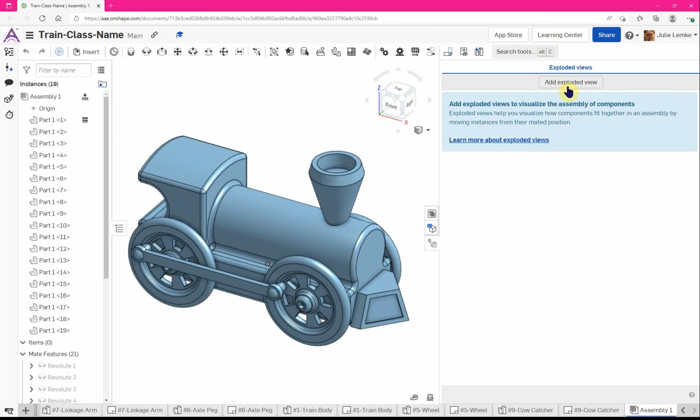You can find that in this little box right here. If you hover over it, you can see it says exploded view, so you click on it, then click add exploded view. Sometimes it takes a little while for that to show up. It did the first time I did it, I'm not sure why, but after that it'll show up pretty consistently.

Alright, so I'm going to zoom out. What you do to make an exploded view is basically pull all the pieces of your train off so you can see everything individually.

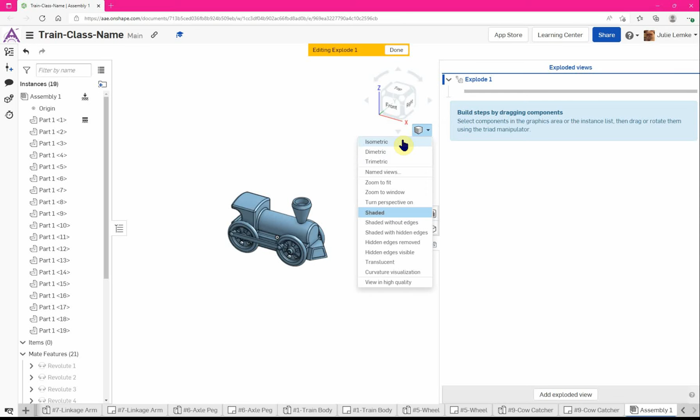One thing you want to make sure is that you get this view set to isometric. The reason is because when you do your work drawing later, isometric is how it's going to be placed in. Trimetric is the default for this program, but with work drawings, isometric is what you want.

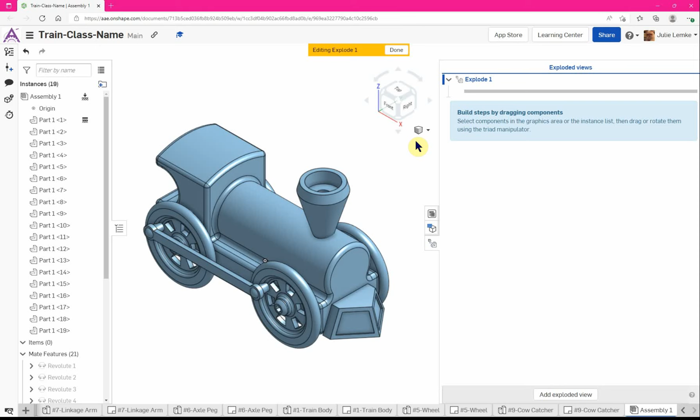There's ever so slightly a tiny little change, but when you're pulling things apart and want to make sure nothing's overlapping, that tiny change will go from everything looks fine to things are overlapping. So what we can do here is start by clicking on a piece.

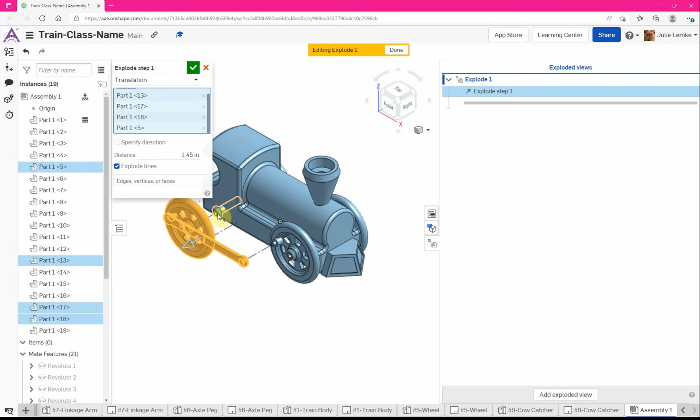I'm going to show you that you can actually move more than one piece at a time. I'm just going to pull these pieces - you can see how I moved the axle peg and the linkage arm all at once. Then I can grab a few more, and if I forget something, I can grab it all at once like that. I'm just going to scoot these out a little bit.

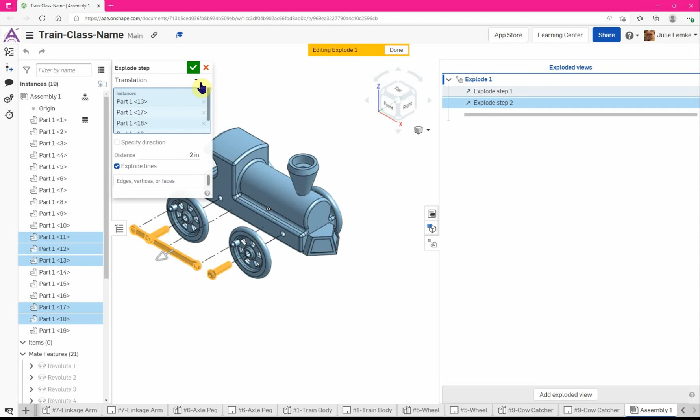Now I don't want the wheel, but I still want to pull some pieces out. Now I don't want these two pieces, and now I want to get rid of that one and just move those. Hopefully you guys are better at zooming than me. Alright, so that is everything we want for that one side.

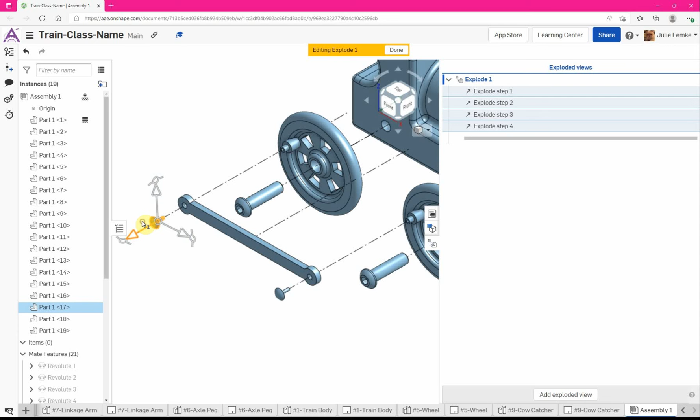Alright, the next one I'm going to do - you're wondering how I can move this. I'm using a desktop, so I have a mouse, so if you click on your scroll wheel, you can move this around. It's called pan, and it's quite helpful for when you're moving things around in a view like this.

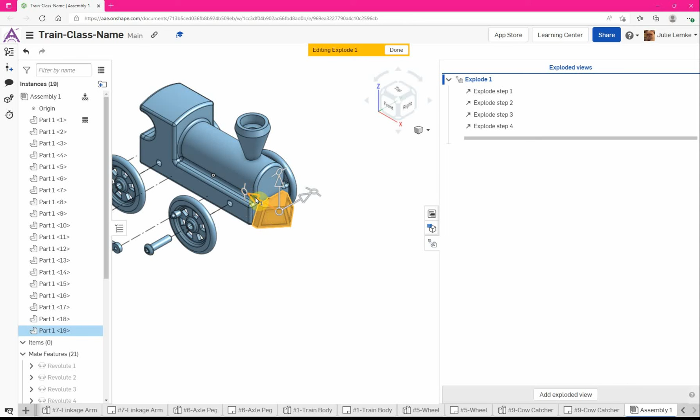So we click on our arrow and just drag. That's all we need to do for that piece. Alright, and then on this back side, I'm going to do the same thing that I did with the front, where I have a whole bunch of things selected all at once. Hopefully you have better luck clicking than I am. There we go.

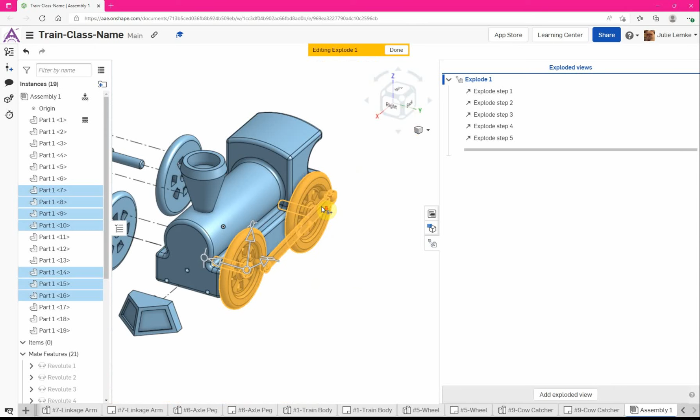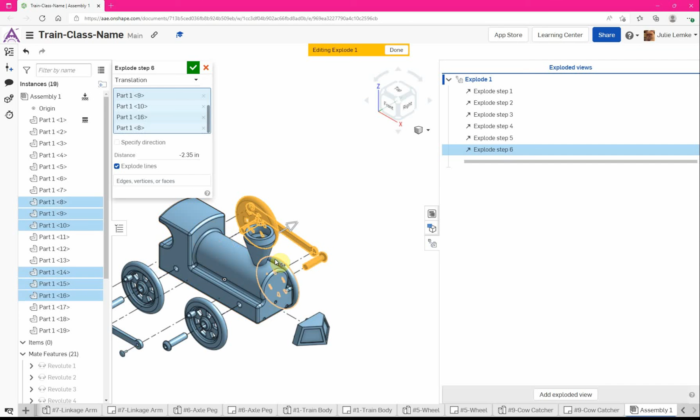Alright, again we want it isometric, so we're going to scoot this over. I know it looks like some things are overlapping, but this piece is going to be moving in a second. Alright, so I'm going to deselect the wheels. Oop, I forgot to click OK first. There we go.

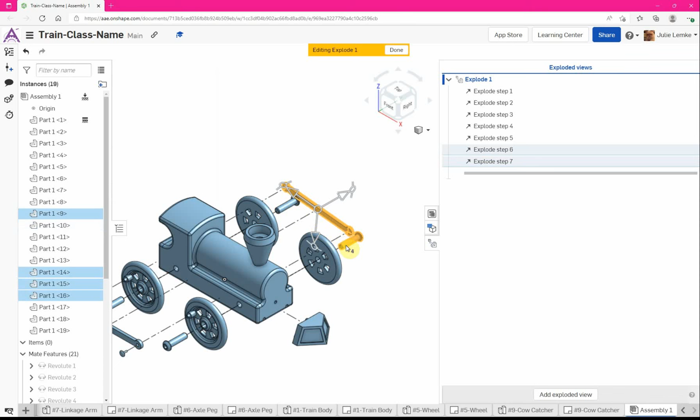Alright, now I want to deselect the wheels, click OK, deselect our axle pegs, scoot it a little more, accept. Unselect our linkage peg, or not - oh my goodness, linkage arm, and then we're going to move our linkage pegs. Alright, so that is all set for there.

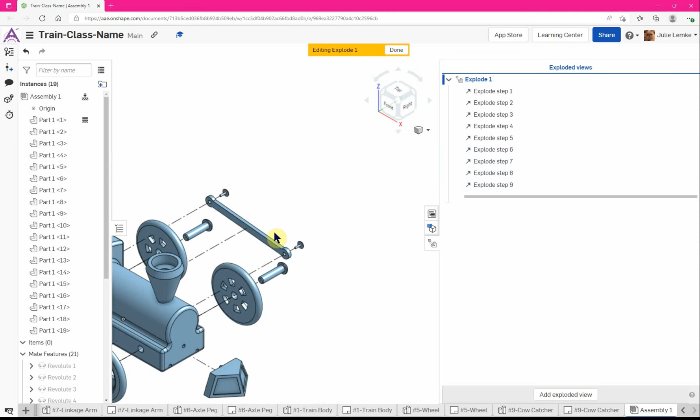So we're going to unselect everything, and now we need to move our stack. We're just going to scoot that straight up. See, that's why I said having it overlapping before wasn't too big of a deal, because we can easily just move it all in one. Alright, and now we're going to move on to our hitch magnet and hitch peg.

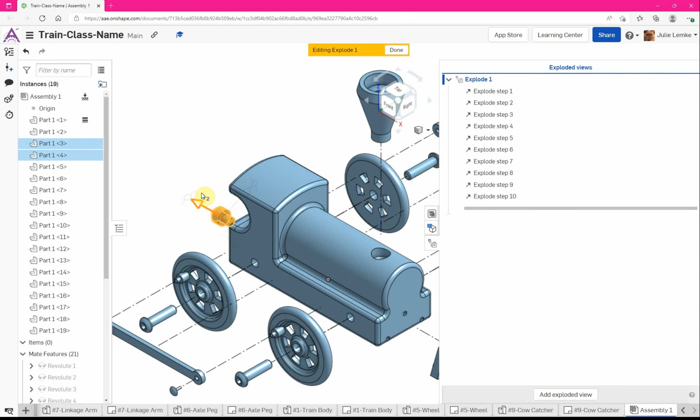Again, you want to go isometric. Alright, so I'm going to scoot this to about here. I know it looks like this one's overlapping a little bit, which it kind of - oh, it actually isn't - but it doesn't really matter because we're going to have the magnet sitting right here. The hitch magnet and the hitch peg, we're going to pull those two pieces apart.

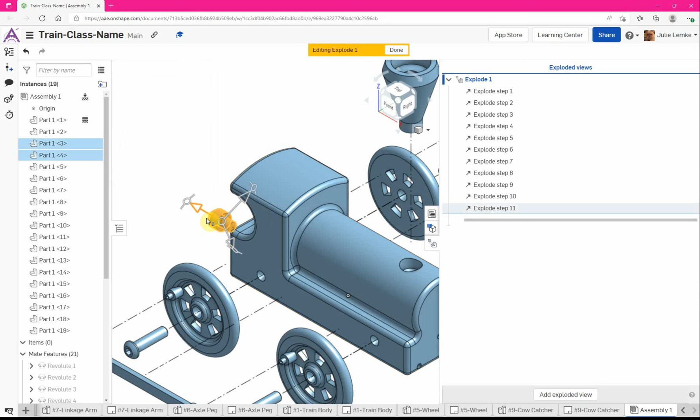Alright, so we're going to unselect the magnet, we're going to move the peg, accept. We're going to zoom out and double check to make sure we are still in isometric. We are. Everything looks like it's separate, nothing overlapping. So that means that this is good to go, it's all set, no issues.

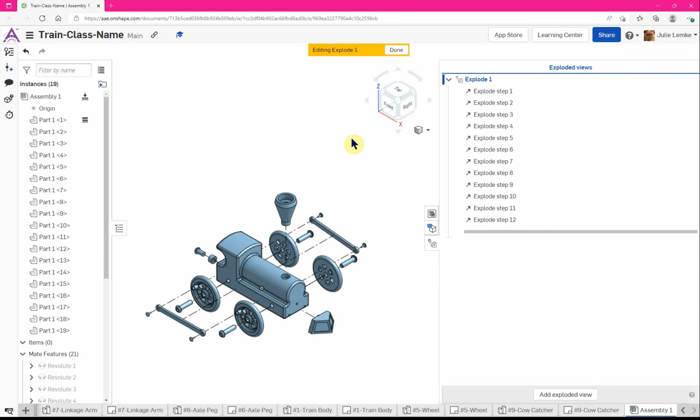Alright, so then we can click done to show that it's done. I know that it all smooshed back together, but that's totally fine, because if we look back at our exploded view, it's there, but when we click done, it goes back to our normal assembly, because the assembly and the exploded view are all in the same one file, unlike when we were doing parts and assemblies and work drawings, how those are all separate.

I don't know if you can hear, but my cat is on a blanket right now.

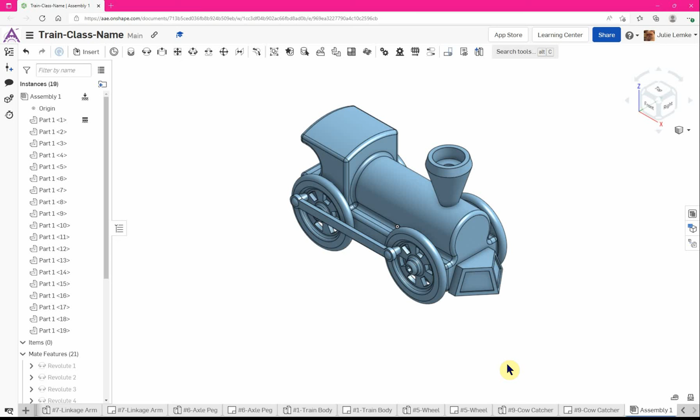So the assembly and the exploded view are the same one file. Alright, so in the next video, I'm going to show you how to do the work drawing. This is probably going to be one of the fastest work drawings you do, so it'll be nice and quick. Alright, so good luck.